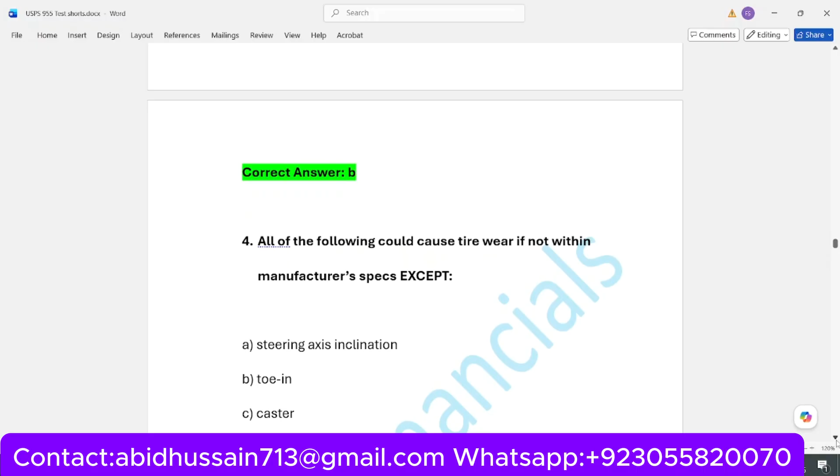Number 4, all of the following could cause tire wear if not within manufacturer specs except: A, steering axis inclination, B, toe in, C, caster, D, camber. Correct answer is option C, caster.

Question number 5, a hydro boost system provides assisted power to steering in which other system? Option A, electrical, B, air ride suspension, C, air conditioner, D, braking. Correct option is D, braking.

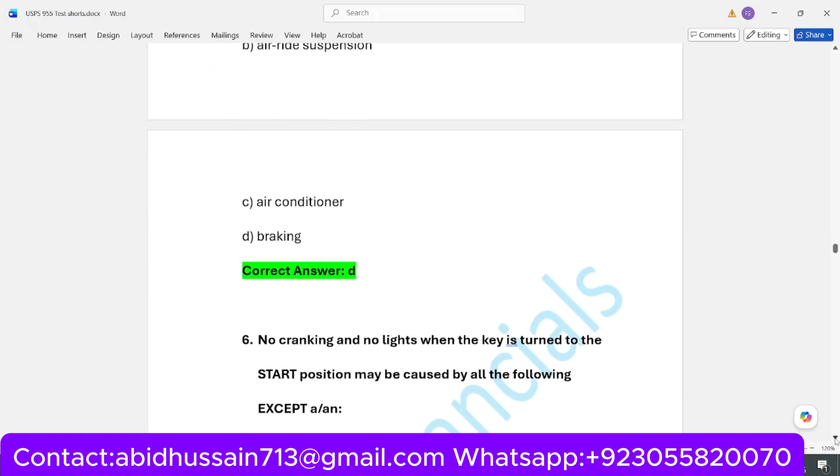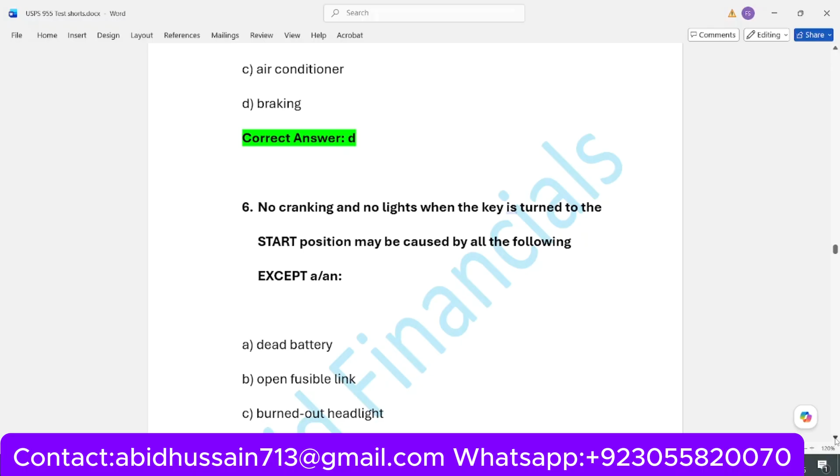Question number 6, no cranking and no lights when the key is turned to the start position may be caused by all the following except: A, dead battery, B, open fusible link, C, burned out headlight, D, open circuit. Correct option is C, burned out headlight.

Next question is section 2, automotive technician. The time is 30 minutes.

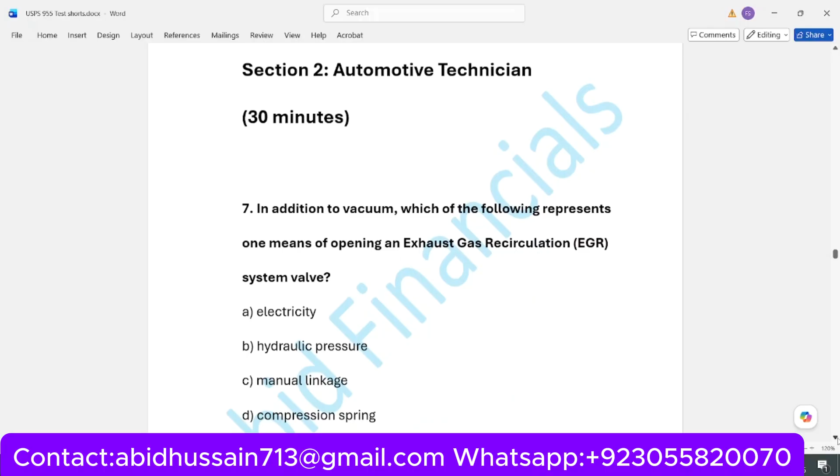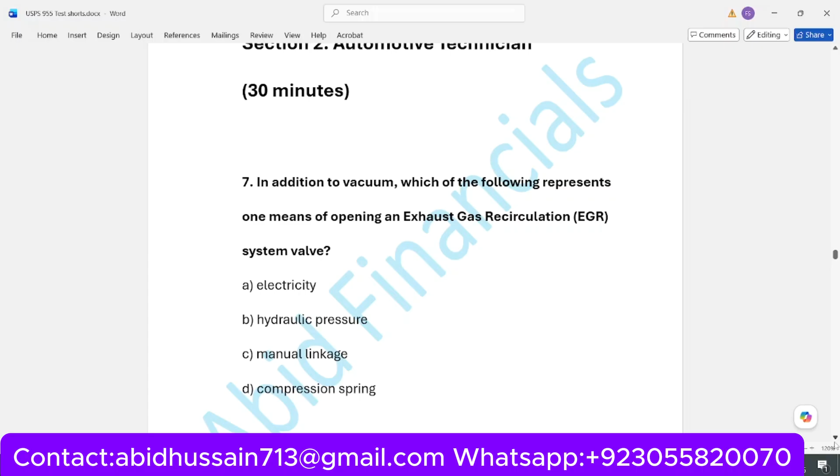Question number 7, in addition to vacuum, which of the following represents one means of opening an exhaust gas recirculation system valve? Option A, electricity, B, hydraulic pressure, C, manual linkage, D, compression spring. Correct option is A.

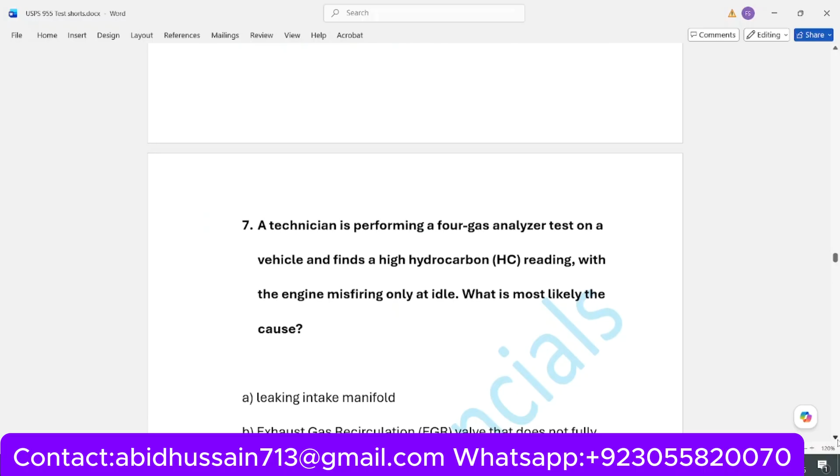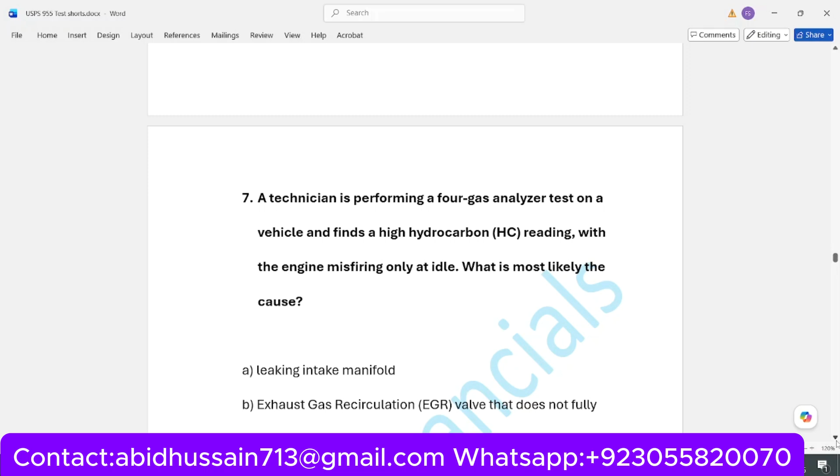A technician is performing a 4-gas analyzer test on a vehicle and finds a high hydrocarbon reading with the engine misfiring only at idle. What is most likely the cause? Option A, leaking intake manifold, B, exhaust gas recirculation valve that does not fully close, C, secondary ignition wire shorting, D, partially clogged fuel injector. Correct option is B.

Question number 8, when a transmission in the park position emits a high pitch whine that increases with engine revolutions per minute, what is the most likely cause? Option A, a bad front pump, B, a loose torque converter, C, misadjusted park pawl, D, a worn speed sensor. Correct option is A.

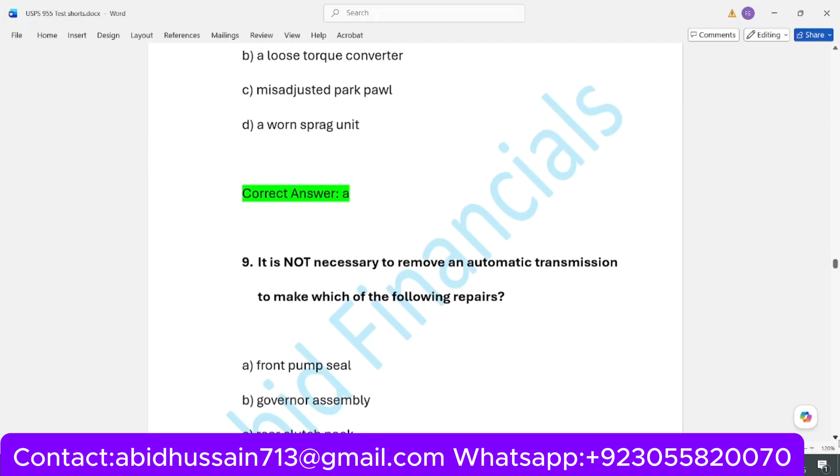It is not necessary to remove an automatic transmission to make which of the following repairs? Option A, front pump seal, B, governor assembly, C, rear clutch pack, D, stator support assembly. Correct option is B, governor assembly.

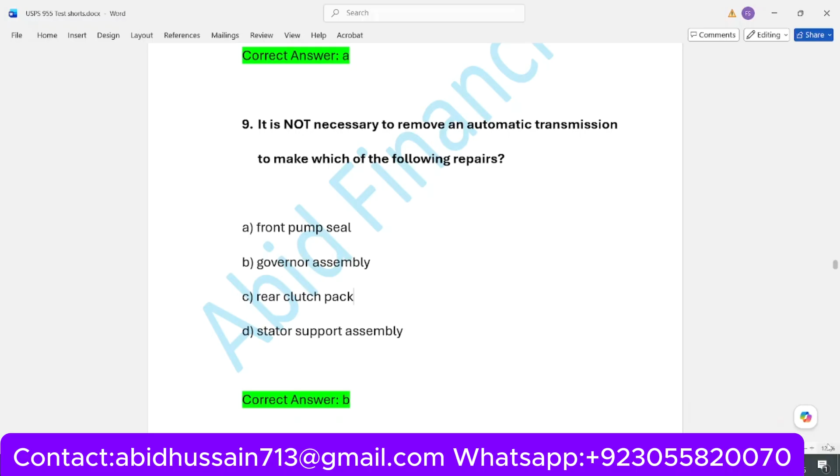Question number 10, a wet compression test is used to isolate which engine defect? Option A, leaking head gasket, B, worn valve seats, worn valve seals, worn piston rings. Correct option is D, worn piston rings.

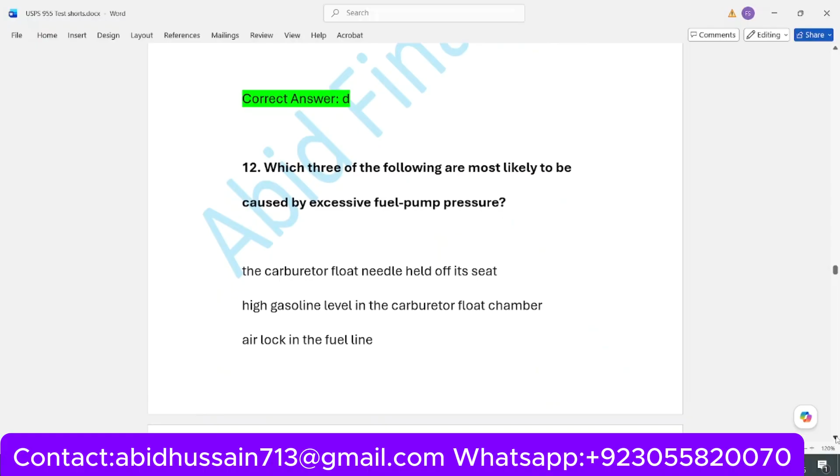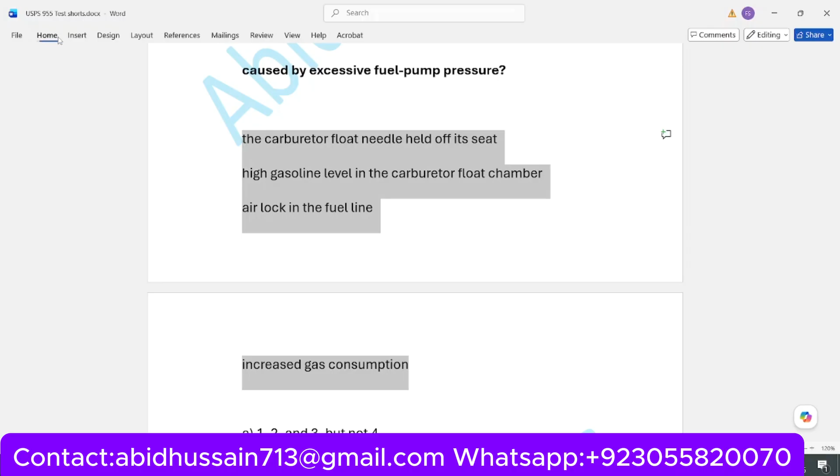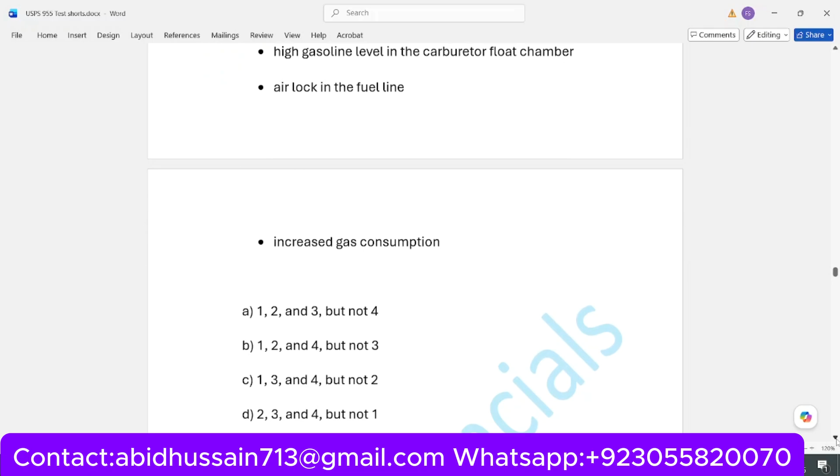Which three of the following are most likely to be caused by excessive fuel pump pressure? The four options are: float needle held off its seat, high gasoline level in carburetor float chamber, airlock in the fuel line, increased gas consumption. Correct option is B, 1, 2, 4, but not 3.

Important exam rules: this exam is a physical exam, you cannot take it online on their websites. You need a minimum of 70% passing marks, and the total time is 60 minutes. There are two sections, 30 minutes each. Bring a valid government issued photo ID. No personal items like electronic calculators are allowed. You can only reschedule or cancel before 24 hours before your appointment. Being late for more than 15 minutes means you are not allowed to take the test. A calculator is usually provided for some exams.

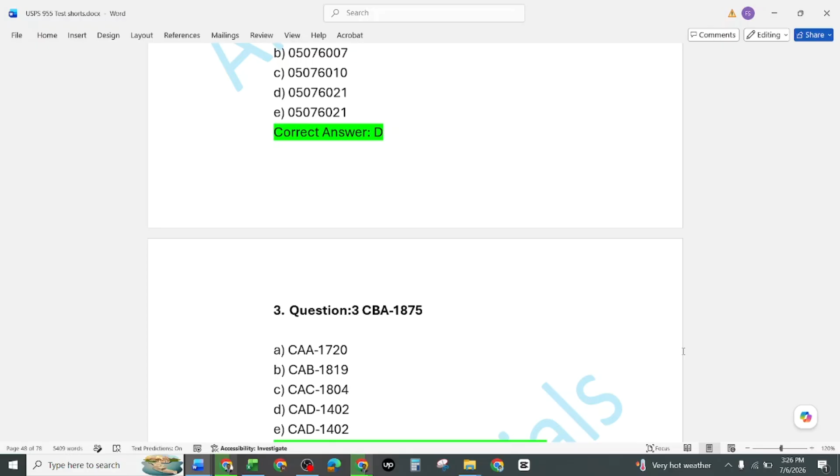Next is question number 3, CBA 1875. CCA, CAA 1720, CAB 1819, CAC 1804, CAD 1402, and CAD 1402. What is the correct option? Correct option is option E, CAD 1402, or D depending on the exact position, which is this E.

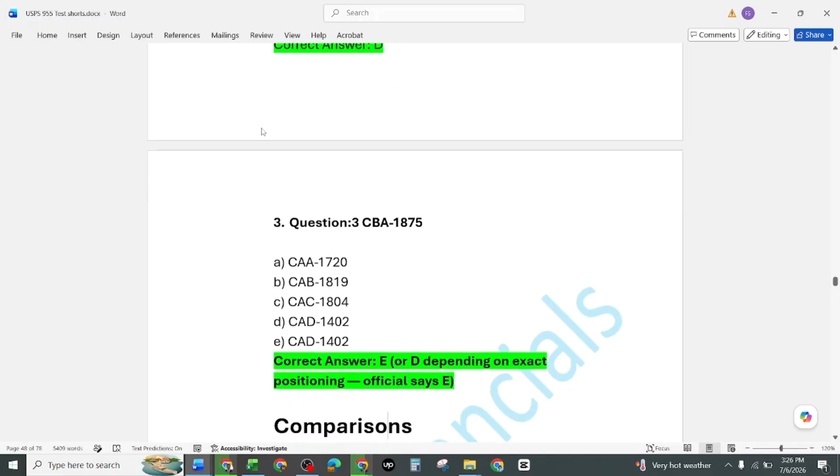Comparison question 4, Helene, Bidal, Helene. These are the different names, and the correct answer is that the second and third are exactly alike.